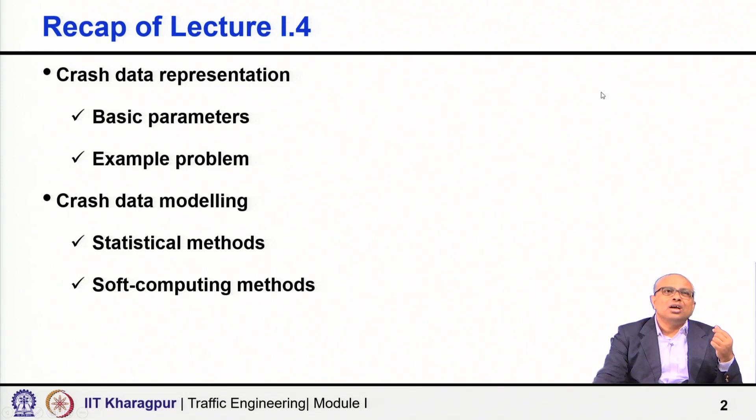Now, with this background, today in this lecture we shall discuss road safety audit. What is road safety audit? It is a formal procedure. Please carefully note, we are talking about a formal procedure for assessing accident potential. Again, observe and carefully note, we are talking not about accidents, but accident potential. That is very, very important.

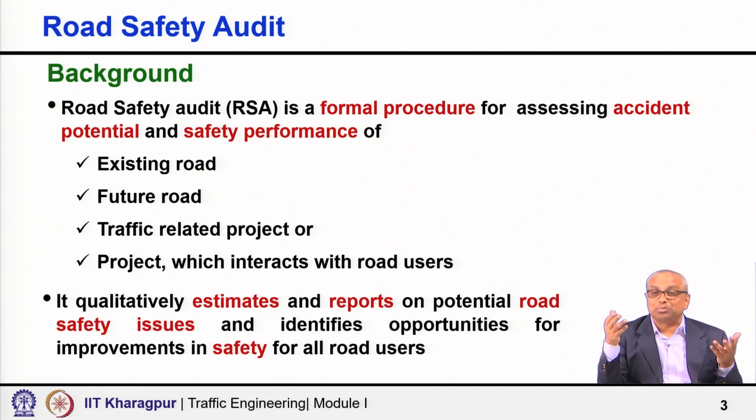And the safety performance of any facility, maybe an existing road, future road, any traffic related project, or a project which interacts with road users. It qualitatively estimates and reports on potential road safety issues and identifies opportunities for improvement in safety of all road users. That is again important - all road users, not only motor vehicle users or car users, but all road users. So we are talking about a formal procedure for assessing accident potential and safety performance of any facility where road user interaction exists, with an intention of improving the overall safety performance for all road users - bicyclists, pedestrians, public transport users, motorcycle users, car users, everybody.

Now, there are certain characteristics which are very important. As I said, it is a formal process, not an informal check, carried out by persons who are independent of the design and construction. This is again very important. Many times I have seen people do not understand it. A designer is also competent; a designer or a practitioner working in the field is equally competent. But look at the accounts department of any organization - they do the accounting, they are competent, but they cannot audit their own account.

So it has to be audited by someone who was not involved in preparing this account. That is very important. Why? It is only so that a fresh look at the whole thing can identify whether there are apparently any safety concerns, and if so, bring it to the notice of the designer - saying, I have these concerns. Let the designers either accept or reject it. The designer may also say, no, what you are saying is there, but this is the way I have protected against it, that will not happen. Fine, that is also possible. So it is all like a team game - client, designer, and auditor. All together we should try to make our infrastructure and facilities safer.

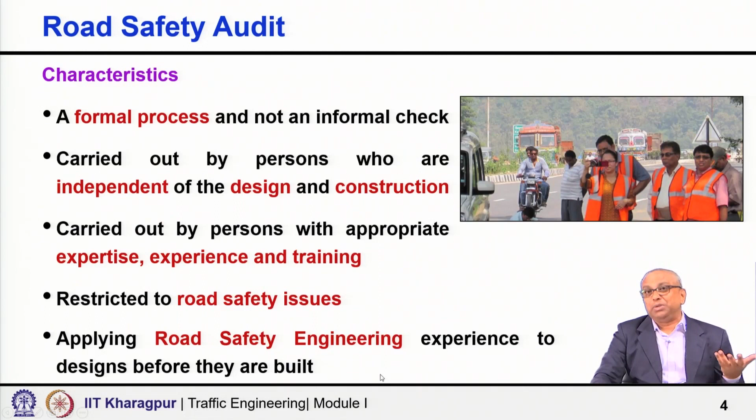Aims and objectives also obviously to ensure a high level of safety in all new or existing road projects, minimize the risk and severity, minimize or avoid crashes in the adjacent road network, reduce the life cycle cost or long term cost of the project, because the earlier you take action, you eliminate the

road crash, because you are assessing the potential, and if any deficiency is found in the concept, design, or implementation, you immediately correct it. So you are not waiting for accidents or crashes to occur and people to die or get injured. So obviously, the earlier you take action, you are actually gaining in terms of your long term cost or

the life cycle cost. Promote the safety of all road users, new and existing, all is very important here, not only car users, but all road users, and overall it helps you to improve awareness of safe design practices.

Because in India, as I told in the beginning, we are building roads, but building roads and building safe roads and transportation facilities are two different things. We need to build safe road infrastructure, not only roads, but safer road infrastructure.

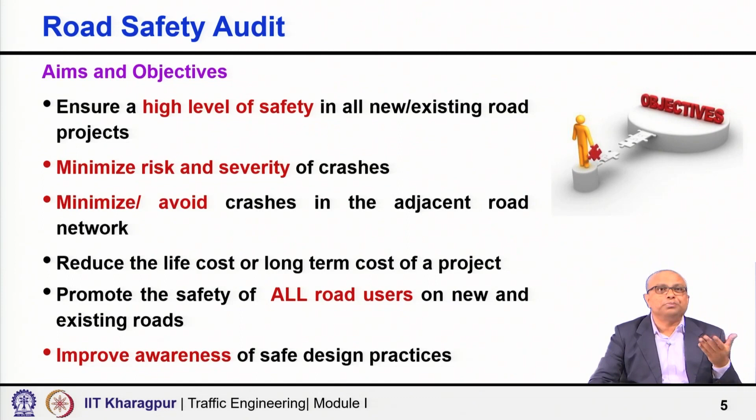Type of projects - I said any project, it may be a new expressway, a major divided carriageway road, signal upgradation, or maintenance work - anywhere, wherever human beings or road users are involved, their behavior is involved, please include such projects in the road safety audit.

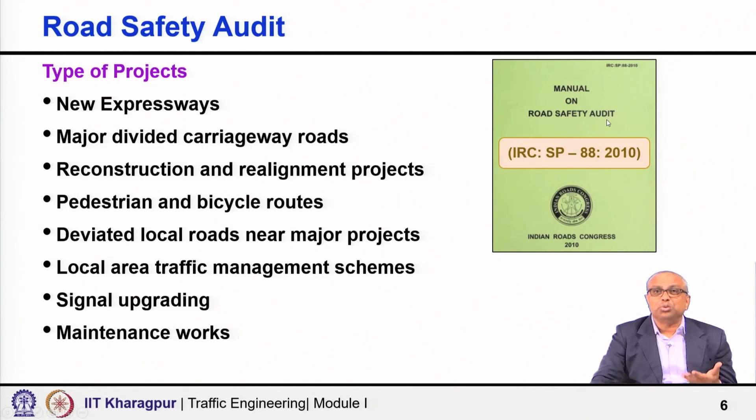We have in India IRC SP 88, the Indian Roads Congress guideline, which is a manual on road safety audit, quite useful. If you are interested to know more, you can refer to this manual as well.

What to look for in RSA? Yes, certainly some mistakes in terms of design, construction, operation, and lack of attention to details.

You might have designed the intersection, but have you really considered all the requirements of different user groups while designing the intersection? Maybe nearby there is a school and a lot of school children are crossing the road at the junction. Have you specially given consideration to this requirement of school children, or have you just simply used a prototype design, which designers often do, a typical design, put it there.

It might be okay, but it needs a little bit of modification to take care of the requirements which are very specific to that location.

Lack of understanding of safety issues and potentially hazardous locations, interaction of design elements, improper provision for vulnerable road users, and improper or misleading design. All these we try to look at from a daytime, night time, all road users point of view, all types of road users, from school children to senior citizens, elderly people, even specially abled persons - all requirements you have to think about.

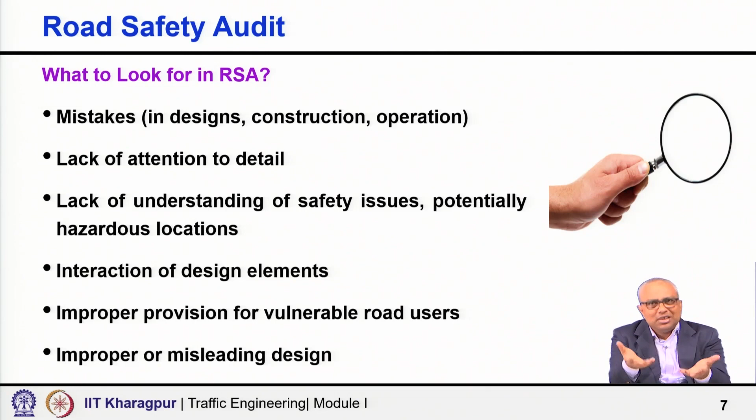This is very important, the next part - crash investigation and RSA. I told about this in my previous lecture, how the crash data can be analyzed. The crash data and RSA, how we compare them.

Crash investigation is a reactive measure. Crashes have happened, you have the data, you have built the database, and I am now trying to analyze to find out how the number is related to what factor, or how the type of crash is related to other variables or causal factors. Or sometimes I have identified the black spots, locations where statistically significantly higher numbers of road crashes or fatalities are happening, and therefore I want to go there, inspect and investigate to see what is happening. Reactive, everything I am doing is reactive in nature. Crashes have happened, and then I am doing something.

RSA, road safety audit, is a proactive measure. I am not waiting for a crash to happen, I am not waiting for a fatality to occur, but using basic safety knowledge, understanding, principles, fundamentals, expertise and experience, I am looking at the existing design, the way you are planning to develop it, and trying to identify whether there is any potential safety issue that in future may lead to road crashes. So it is proactive, not reactive.

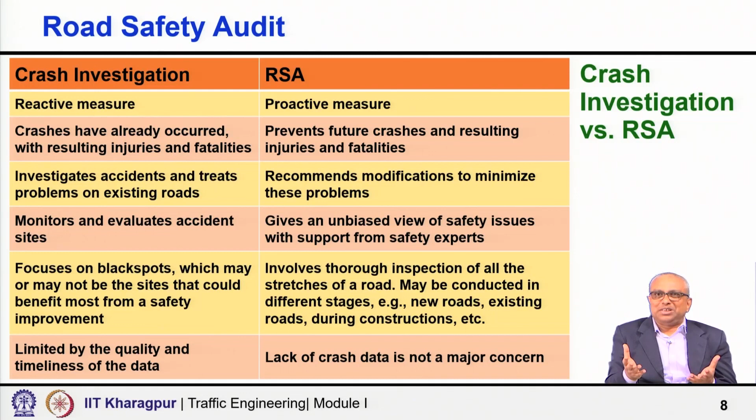So think of that kind of difference between RSA and crash investigation. RSA is like a health checkup. I am not waiting for the problem to occur, but before that itself I am checking whether something is wrong. I am not waiting for the crash to occur, I am not waiting for people to get killed, but I am doing the audit to see whether there are any safety potentials or unsafe things.

There are different stages at which you can apply road safety audit in true sense, across all different stages of road development. After the feasibility stage you can do it, after preliminary design or the draft design stage you can do it, after DPR detailed design you can do it, during construction you should do it, at the pre-opening stage you should do it, and on existing roads you should do it. The purposes are very different. Some issues which can be rectified at the feasibility stage cannot be rectified at the detailed design stage, or some things which can be rectified at the detailed design stage cannot be rectified once construction is done.

Early detection - some things can be detected early, and where it can be detected early, it should be detected and audited early.

But some things, at feasibility stage, you do not know exactly how the intersection design is going to happen - where exactly you put what signboard, or what is the exact shape of the island, what dimension, and everything not known. So you also have to do it at the detailed design stage, because at feasibility stage many things are not known. But whatever is known at feasibility stage, if there are any safety issues, you have to correct them at this stage only. You cannot correct many of those things at a later stage or at DPR stage.

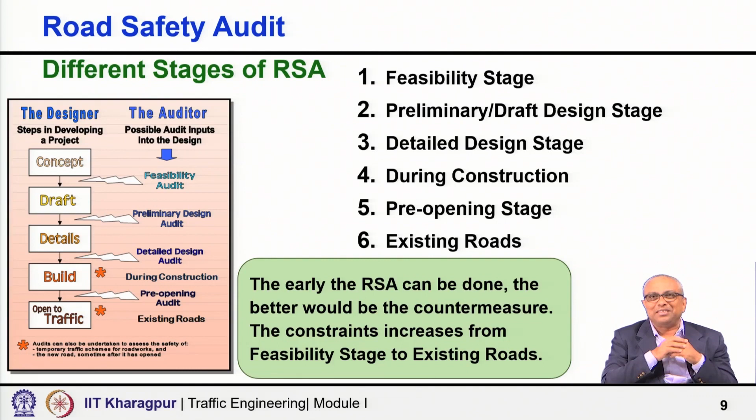But if you would have identified it in the beginning, at feasibility stage or PPS stage, maybe things could have been done in a different way, right. So at all stages we need audit.

Here I have mentioned, you see it in detail. Feasibility stage - what to check, for example, whether the concept is appropriate, whether the route choice options are proper, whether the alignment or ease of achieving design standards - you check that, intersection locations are appropriate or not, the geometry of the intersection, how it will happen, or you may realign so that my intersection becomes a proper intersection. It should not be geometrically deficient right from the beginning.

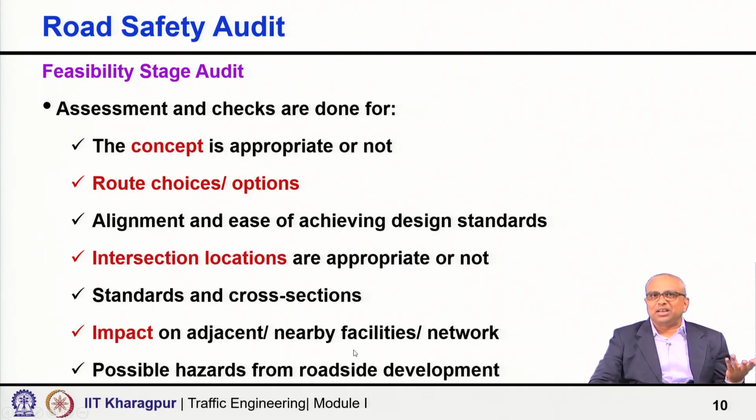Standards and cross sections, impact on adjacent nearby facilities and network - these are the things you can check. Similarly at the preliminary stage, something more is available - a little bit about the geometry, horizontal and vertical alignment, the cross section is available, the concept of signs and markings started building up, right, the concept is there.

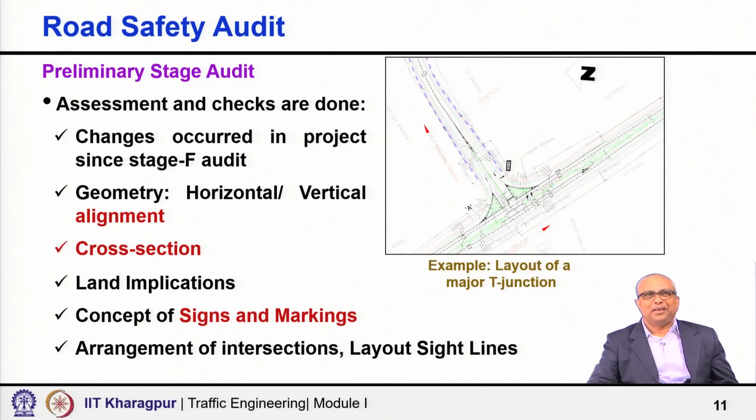So at that stage, whatever information you check, if you identify some lacunas or genuine issues, they can be corrected easily. Then at the detailed design stage, DPR, now you have nearly all the information as it will appear in the field after implementation - that level of detail is available now in front of you on paper or in the form of a drawing, everything is available.

So that is the detailed design stage audit.

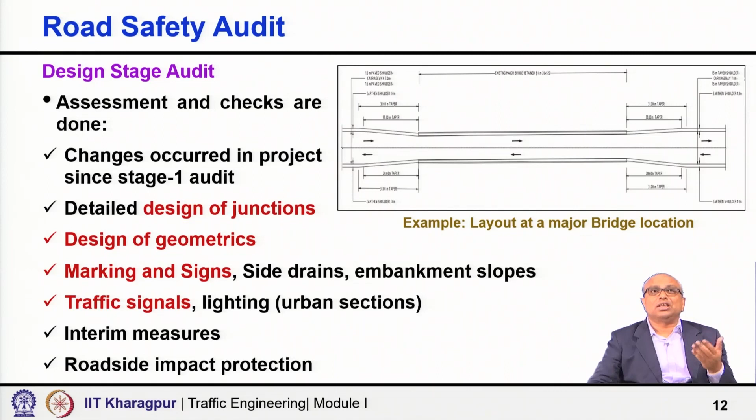Then during construction - in countries like India, we have a major issue that the concessionaires or contractors who execute the road project often tend to think that whatever I am doing during construction is only temporary, it is only for a few days, then everything will be back to the regular finished thing. So just for a few days, why spend money, why be so careful? But you have to understand, if a fatal accident happens, the fatality happens permanently, not temporarily. Any disability due to a severe crash happens permanently.

So you have to audit. In a country like India, the construction stage audit is really very important. A good number of accidents or crashes occur at or around the construction site, because many times the proper diversion of traffic and the protocols are not followed properly. Who has to check? It is only the auditor who can check it, and the cost involved is negligible compared to the project cost.

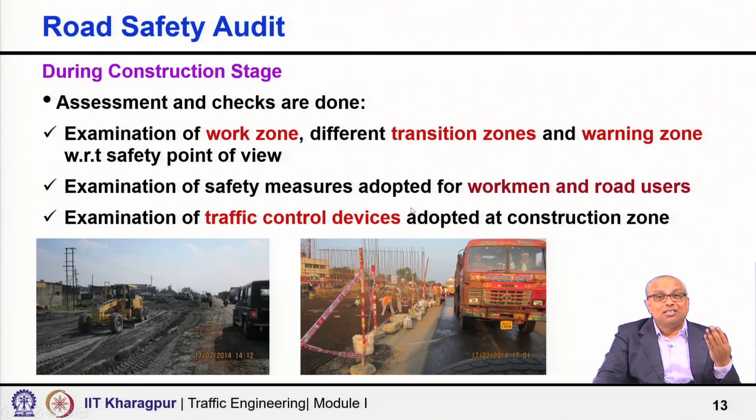Construction stage audit is very important for countries like India. Till now, everything was on paper up to the DPR stage. Now the facility is available.

So although you did the audit at every stage, once everything is done, before opening the road to traffic, do a pre-opening audit. See whether drive through, and just check whether everything looks perfect. Maybe some fine tuning needs to be done at this stage, which you could not anticipate, which you could not think actually looking at the things on paper.

Or maybe you will say, okay, the sign is there, change the angle a little bit, then the line of sight will be better, the visibility will be better, the functions will be better. Or you may say, okay, install one more sign here, repeat this thing there also. Or you say no, 3 are not sufficient, maybe put one more.

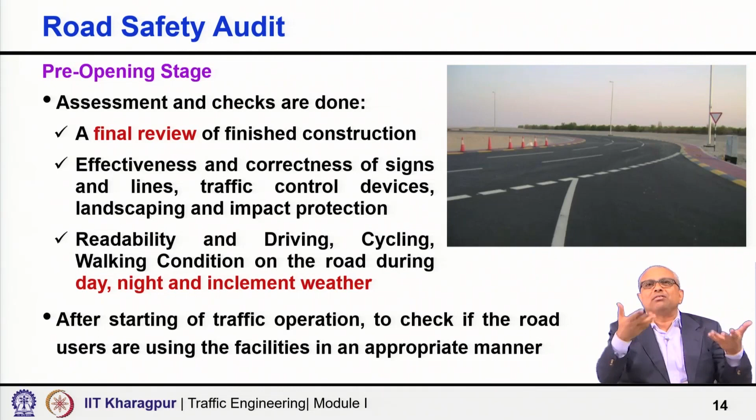It will be better for the road user. So you have the facility in place. Now you can see whether everything is fine, and if there is anything, you can make the necessary corrections.

Operation and maintenance stage, again very important. You develop a facility considering the current requirement, and when you open it, maybe you develop it considering future requirement also in the context of demand forecast. But when you develop and audit it at opening, you say yes, the road is safe now for the road users, but then things are changing very fast.

Take a country like India, or Asian countries, things are changing very fast, population is growing, the land use is changing. You built a road where practically nothing was there, an open area, no interference. Down the line, 5 years later, you will find a number of markets have come up near the road, or some places which had only a few houses in the surrounding area.

Now it has become like a semi-urban development, with multiple households, and some local shops have developed. Land use is changing, and earlier there were not so many pedestrian crossings, but now because we have a new industry, or new offices, government offices or something, a lot of people are now crossing. So now the requirement has come, now there is a safety issue.

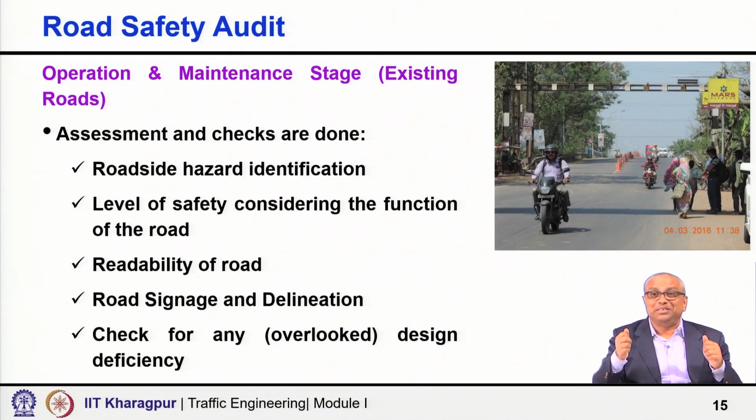So you need to upgrade. The operation and maintenance stage audit should be carried out on a regular basis at regular intervals, just to ensure that we are always keeping our facilities and operating them with due regard to safety.

RSA process involves site inspection day and night, because the road during daytime and during night time looks different. So day and night audit, both times you have to audit. Also during inclement weather, when the weather condition is bad, if possible.

Not always you may get an opportunity, but if there is a possibility, you should try to do that. When it is raining, how it works, how the road looks, because the facility during daytime, during night time, during rainy days may look entirely different. So we want the facility to be safe during all these periods.

Also, attention is required to be paid first in overall, then in details, including adjacent or intersecting roads, consideration of the perspective of all road users, consideration of different movements and maneuvers, everything.

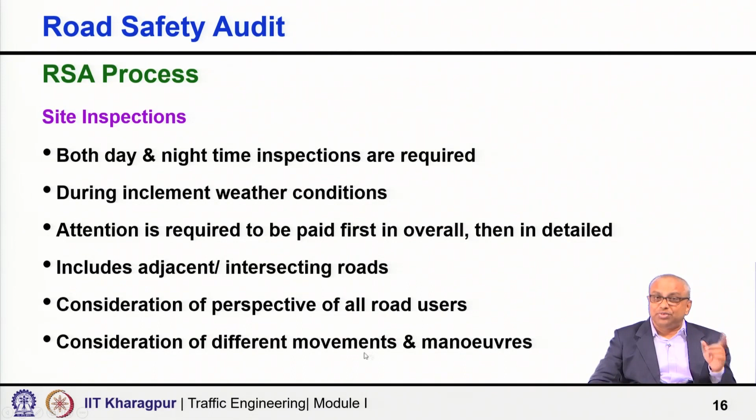Then there is an RSA checklist. IRC SP 88 provides that, in Indian conditions you can check that, it is very good. But remember that audit is not a ticking exercise, it is not just filling a form, it is the core expertise. You must have clear understanding, experience, expertise, and then it is the application of that.

Yes, it provides some checklist just for you to say that you should at least do this minimum, you should not forget these aspects, it is just to remind you. But it is not really a ticking of activities. So it is not that you send anybody and everybody to a project site and ask them to fill up this questionnaire, tick these places, and say the audit is done.

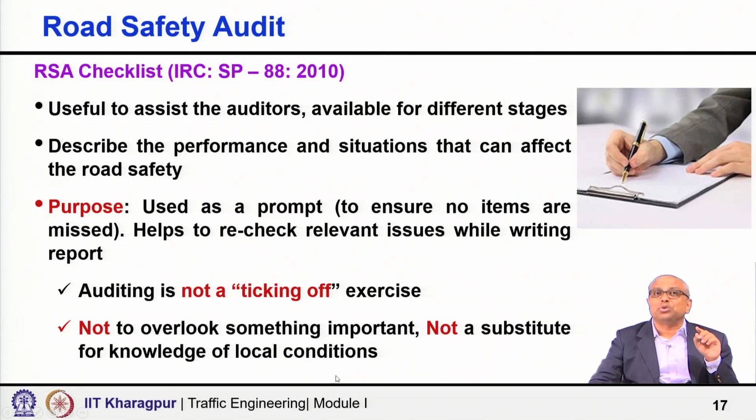It is not nothing like that. It is there only to ensure that you do not overlook something important, but a checklist is never a substitute for knowledge of local conditions.

These are commonly identified problems, a few I have picked up here and there. For pedestrians: maybe not a continuous walkway, improper location of crossings in urban areas. Walkway is there, but it is not continuous, so in some portions people use the footpath, then come onto the carriageway next to busy traffic, with no crossing facility or guard rail, so they can cross anywhere, everywhere within the market area.

For cyclists, there is absence or discontinuity of cycle lanes, either it is not there or it exists for only half a kilometer. But what do you do before or beyond that point? It has to be continuous, a network of bicycle facilities. The networking concept is important.

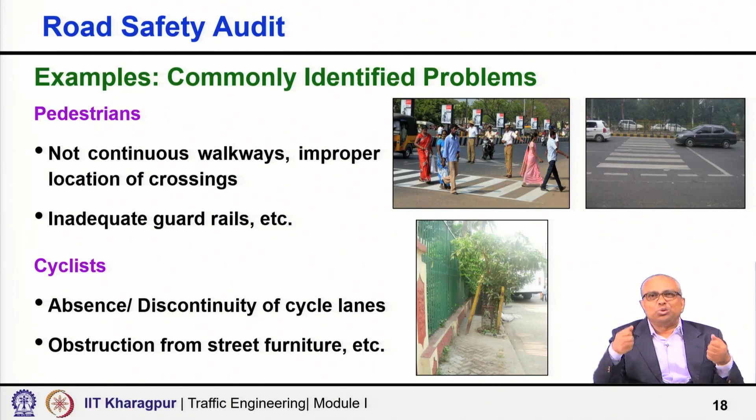There can be obstruction from street furniture so they cannot go through. For motorcycles, issues include slippery road surfaces, and manholes that are sometimes not in proper shape.

For public transport users, there are inadequate facilities and unsafe locations. Maybe the bus stop is located in an unsafe location. I have seen many times bus stops not located safely. Sometimes moving it just 20-30 meters upstream or downstream could make a big difference. People are alighting, but there is no crossing facility nearby. So if you are giving a bus stop, give a crossing facility too. That is the kind of thing to watch for.

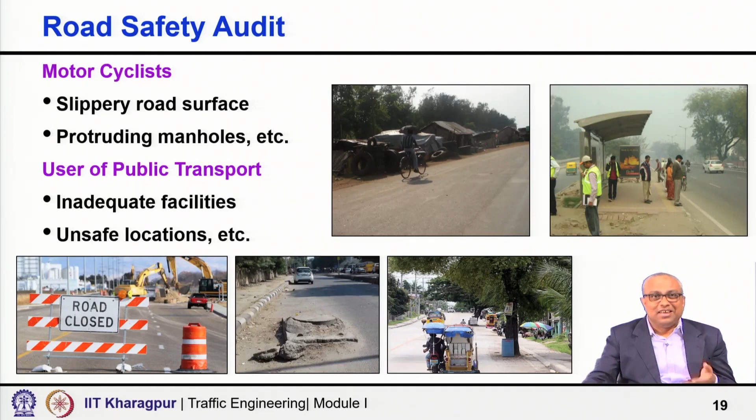Then for vehicle users, often there are long segments with engineering issues. I have mentioned a number of things, but the photographs are also interesting. You see this kind of design - a depressed median is very good, but not like this, because look at this edge line. If there is a slight error, the driver has no opportunity to regain control of the vehicle. It is surely going to be a crash. So it is not a good design, not a good road.

You cannot just suddenly block the road during construction. Do you expect vehicles to suddenly stop or suddenly change lanes? It should be informed well in advance, and the barricading should happen in a completely different manner. There are many issues - sometimes signs, lamp posts or light posts may be in front of the safety fence. Maybe the relocation has not happened, but then you should not open the road to traffic. You do that, and only then open it.

So there are a number of issues, and in a country like India, where we have issues with good crash data, we are developing now, we are improving, and we have a bright future, I am sure. But for the moment, a good database is not uniformly available all across.

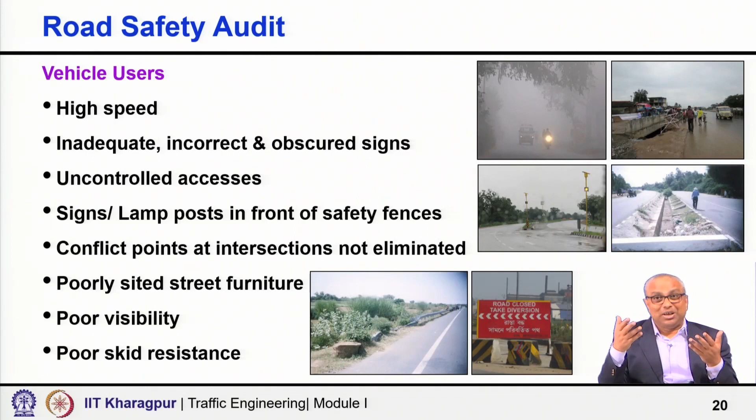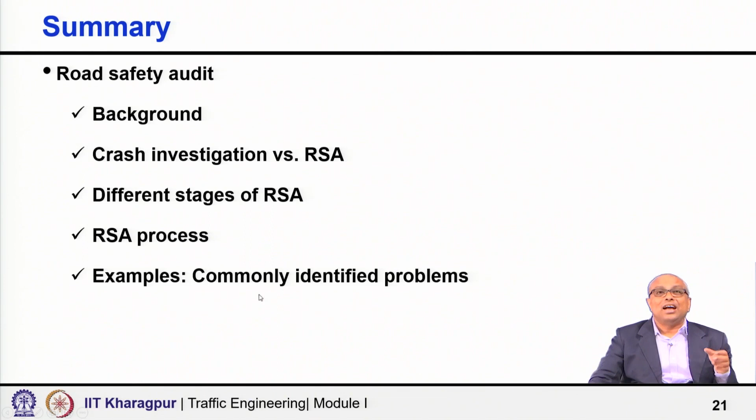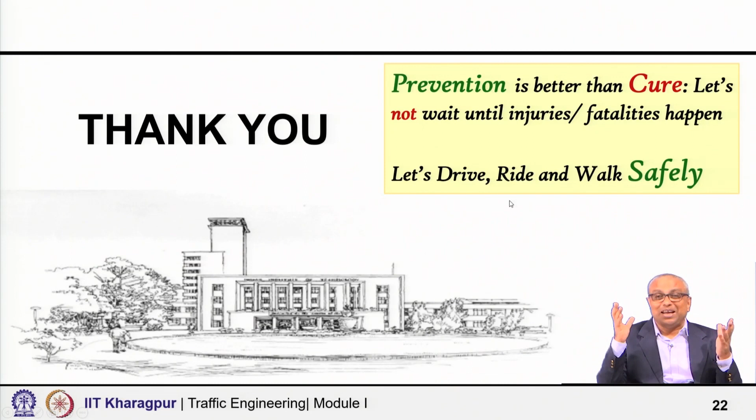So to summarize what we discussed: why we need road safety audit, what road safety audit is, the difference between crash investigation and road safety audit, the different stages of development where RSA may be required, the process of RSA under day, night, good weather, bad weather conditions, and a few example problems from audits. I would like to close by saying prevention is better than cure - let us not wait until injuries or fatalities happen. Let us do the road safety audit and overall improve the environment, making it safer. Thank you so much.